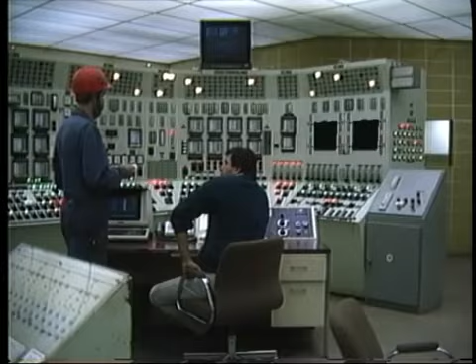Let's assume that our boiler is being returned to service after a maintenance outage. It is completely cold. The first step in preparing this boiler for service is to make sure that all of the maintenance jobs have actually been completed and that all permits to work have been canceled. We then need to take a walk around the boiler to make sure that all workers are out, all tools, materials, and debris have been removed, and that access doors and manholes are closed. All auxiliary equipment, such as feedwater pumps and fans, must also be ready for operation with switchgear and breakers racked in and power supply available.

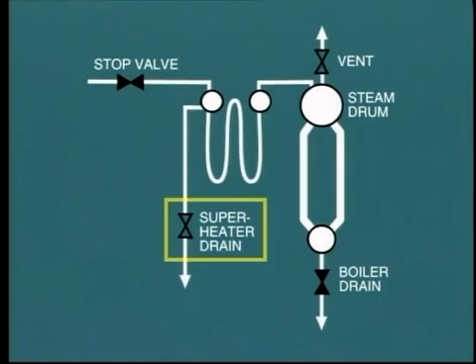If the boiler has been drained during maintenance, it will now be necessary to refill to the working level. Before admitting any feedwater into the boiler, make sure that the appropriate drain valves are closed. We must also check that the air vent valves are open on top of the steam drum. The superheater drain valves should also be open.

In order to pump feed water into the boiler, it may be necessary to run the feed pump. However, in many installations, an auxiliary low-pressure pump may be provided for this purpose. As feed water enters the boiler and the water level rises in the tubes, air will be expelled from the open vents. The boiler should be filled to a level so that it is just visible in the bottom of the gauge glass - that is about 3 or 4 inches, say 10 centimeters, below normal working level. The reason for this is to allow for expansion as heating of the water takes place.

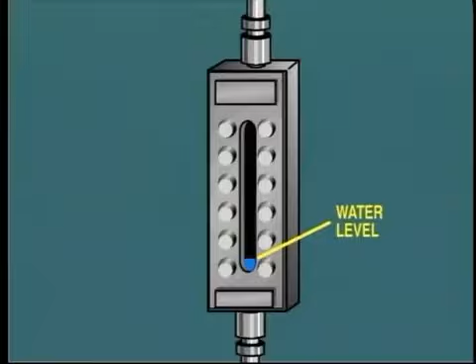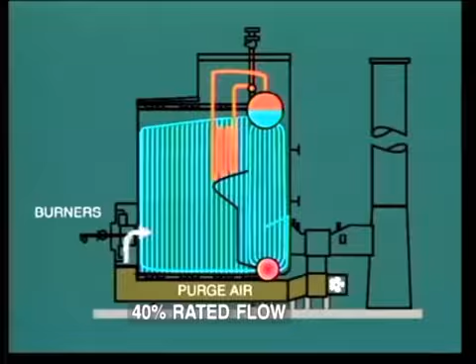While the boiler is filling, we should make sure that the combustion equipment is primed and ready for service. Startup burners normally use light oil or gas, both of which are readily combustible. However, before lighting a fire in the boiler, it is essential to purge the furnace and gas passages. This action consists of passing a large quantity of air, say 40% of rated flow, right through the boiler and up the chimney to atmosphere. The objective of this is to purge, that is, sweep away any combustible gas that may be present, perhaps in pockets of the furnace, superheater, or air heater.

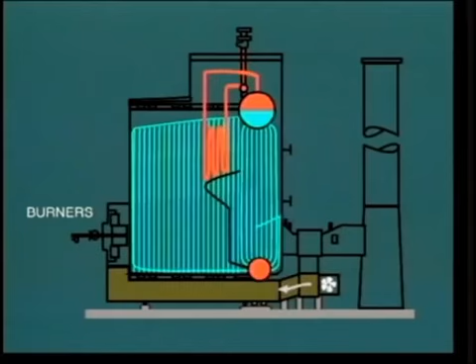If purging is not carried out, there is always the potential for an explosion to occur when the first burner is ignited. The purge action is carried on for several minutes, and this requires that the forced draft fans be run, and induced draft fans if installed. After purging, the airflow is reduced to the pre-established startup value, usually 10 or 15% of rated flow. The boiler is now ready to begin firing.

Each startup igniter is initiated either by local push button or remotely from the control room. The igniter runs through its own startup sequence as follows: check that there is a flow of combustion air, check that oil pressure is correct, close the switch to ignite the spark plug, check that the arc is present, open the ignition fuel valve, and observe that ignition takes place and that the fuel continues to burn.

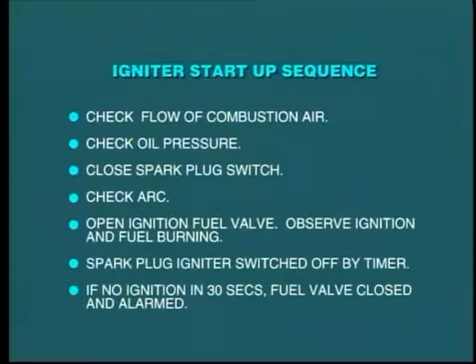Once the fire is established, the spark plug igniter will be switched off by a timer. If ignition does not occur within about 30 seconds, the fuel valve will be closed and the condition alarmed. The rate of adding heat to the boiler is dependent upon the number of startup guns which are placed in service. Also, in many cases, the fuel pressure to the startup guns can be adjusted so as to allow further control over heat input to the boiler.

It takes a considerable amount of time to heat all the metal in a cold boiler, including the water contained inside the tubes and drum. We should expect to see steam blowing from the air vents after an hour or so. We will also notice that the level of water has risen. This is due to both thermal expansion and also some swell as boiling starts to take place. You will remember we discussed swell and shrink caused by steam bubbles in an earlier module.

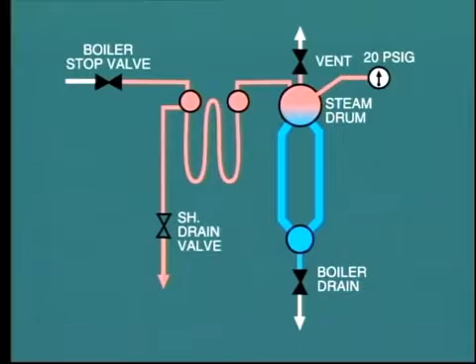When the steam pressure rises to, say, 20 psig or 140 kilopascals, the air vents on the steam drum should be closed. At this point, we can assume that all air has been expelled from the boiler, and steam at this very low pressure fills the space above the water as well as inside the superheater as far as the boiler stop valve. The temperature of the water and the steam and the water wall tube metal will all be at or close to the saturation temperature corresponding to the pressure - that is about 230 degrees Fahrenheit or 110 degrees Celsius.

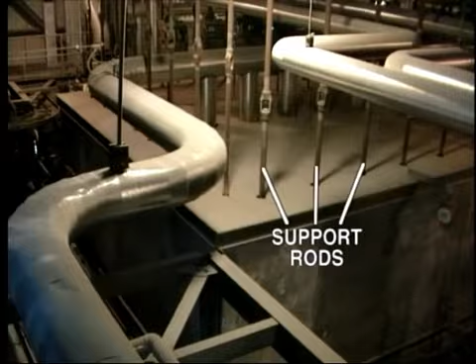This rise in temperature from a cold start will cause considerable expansion of the boiler metal, and this must be allowed for in construction. For example, this particular boiler, which is bottom supported, is built to allow expansion in an upward direction. On large boilers, support is effected from above, with the boiler suspended and held by heavy steel rods, so expansion takes place in a downward direction.

In some installations, you may find an indicator which shows the amount of expansion from the cold position. This may be as much as 12 inches or more, say 30 centimeters, between the cold start position and full load.

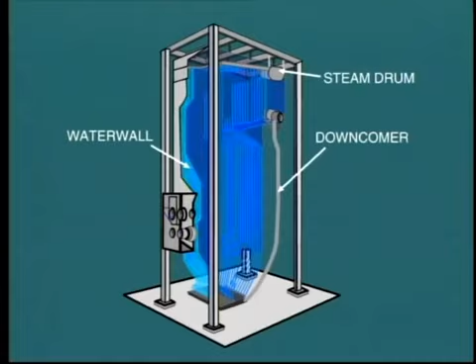Because of the stresses imposed by this expansion of the body of the boiler, there is a limit to how fast we can add heat. A general rule of thumb is that the temperature of the water walls should not increase at a rate above 100 degrees Fahrenheit per hour, say 55 degrees Celsius per hour.

But during this startup operation, how do we know the precise temperature of the water walls? Well, we can easily infer this from the steam pressure. First, assume that the metal temperature is equal to or similar to the temperature of water inside the tubes, and this will be approximately equal to the saturation temperature corresponding to the steam pressure.

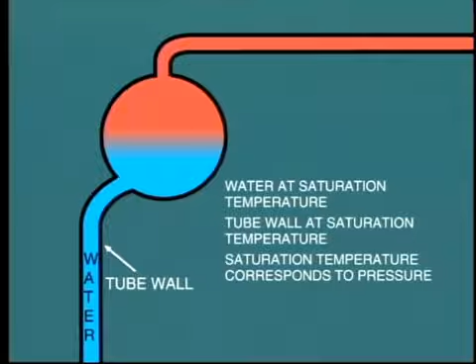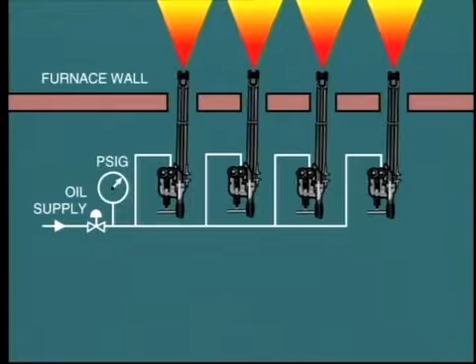So bearing this in mind, let's return to our startup procedure. Now that the drum air vents are closed, the steam pressure will start to increase. We should observe that it rises in accordance with our startup curve, but what control do we have over this? Well, if pressure rises too quickly, we will need to reduce the fuel pressure to the igniters or perhaps extinguish one gun. On the other hand, if pressure rises too slowly, we may need to throttle in the superheater drains, but we cannot go far with this. Remember that it is essential to keep steam flowing through the superheater in order to keep the metal temperature cool.

For some period of time, the water level will continue to rise as pressure increases. This is due to increasing temperature plus increase in steam generation, which creates more bubbles in the water. But where is the generated steam going? Well, the only steam flow from the boiler is that passing through the superheater drains. But of course, as the pressure increases, so will the steam flow increase through these valves. Eventually, this flow will become so great that the water level starts to fall. This means we are dumping more steam than is being generated at this time.

Eventually, as the water level falls further, it will be necessary to start the boiler feed pump and add feed water. We also may be able to throttle in the superheater drains further so as to reduce this wastage.

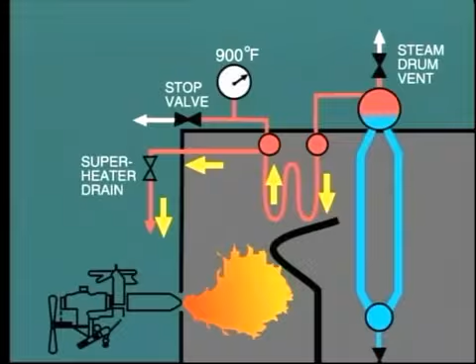Actually, the opening of these valves has some influence on the steam temperature at the superheater outlet. How is this? Well, if the steam flow through the superheater is increased by increased opening of drain valves, the rate of firing will need to be increased so as to continue pressure raising. This results in a greater volume of combustion gas passing over the superheater, consequently transferring more heat to the steam, so raising its temperature. This maneuver is sometimes employed when we are trying to match steam temperature to the steam turbine metal temperature during a unit hot startup.

However, remember that in order to achieve this, we are burning more fuel and dumping heat to waste. In some circumstances, this waste heat may be recovered, and we'll be talking more about this arrangement when we discuss turbines in another module in this series. At that time, we will also discuss the procedure for charging the main steam line and opening the boiler stop valve. We must point out here that a boiler stop valve is not always installed, and in this case, the steam line will be charged with steam throughout the startup, right down to the turbine stop valve.

Often on a cold start, steam is admitted to the turbine quite early in the pressure raising cycle, say when the boiler pressure is about 400 psi. The objective is to raise steam pressure and temperature on the boiler and run up the turbine at the same time. If this is a reheat unit, the reheat drains must be opened during the run-up period.

Once the turbine is synchronized and carrying load, the superheater and reheater drains may be closed, as steam is now flowing through the superheater and reheater and on through the turbine.

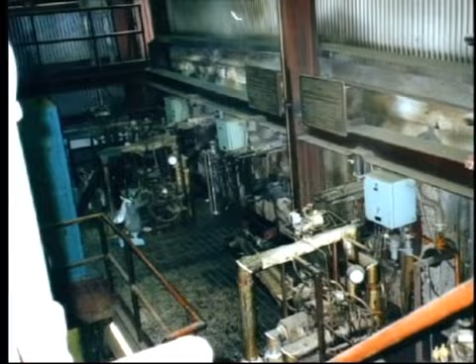Also, during the initial loading, it is likely that one or two of the main fuel burners will be placed in service, and the associated startup burners shut down. We are speaking here of heavy oil or gas firing. Where pulverized coal firing is involved, the boiler will usually remain on oil firing until turbine minimum load is established, say 10%.

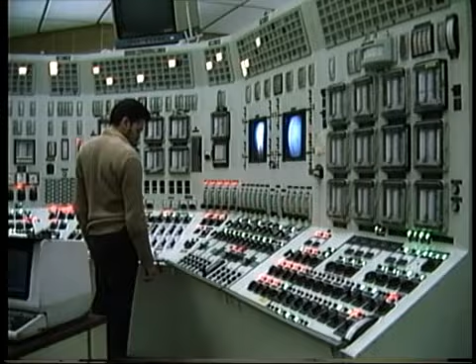During pressure raising on the boiler, attention must be paid to maintaining the correct water level in the drum. As soon as possible, the automatic water level control should be placed in service. Similarly, other controls should be put in automatic service, although this may not be possible until the turbine minimum load has been reached. We'll be discussing monitoring and control systems in detail later.

So at this point, we have the boiler up to rated pressure supplying steam to the turbine generator. The boiler must now be controlled so as to maintain rated steam pressure and temperature as the generator load and consequently steam demand changes. We'll be talking about on-load operation in the next segment, but first, let's take a brief look at a boiler shutdown procedure.

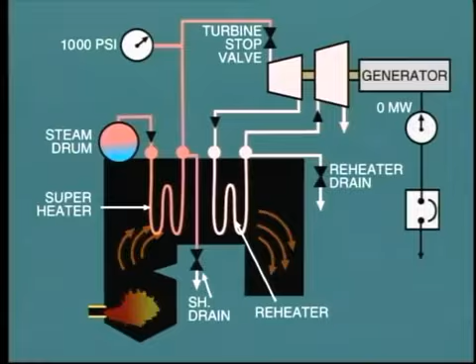As load is reduced on the turbine generator by reducing steam flow, heat input to the boiler must be reduced. This is done by taking burners or pulverizers out of service and reducing combustion air accordingly. Once the generator is taken offline and the turbine stop valve closed, the fire should be extinguished completely. The FD and ID fans will be shut down and dampers closed. All drains should remain closed and feed water topped up to a high level in the gauge glass.

In this situation, the boiler is said to be in a boxed up or bottled up condition. As the heat is retained inside the boiler with very little heat lost to atmosphere, the steam pressure will fall slowly, perhaps to 50% within 24 hours. As the pressure and temperature fall, the water level in the steam drum also falls slowly, so that it becomes necessary to top this up from time to time. The objective of this boxed-up condition is to keep the boiler available for a quick startup. In this condition, we can restart the boiler and raise pressure to rated value within, say, 1.5 hours.

A different situation would prevail if the boiler was being taken out of service for maintenance. In this case, we would run the ID and FD fans so as to purge the boiler of gas and also to force cool the hot metal and refractory. Even when the pressure falls to zero, further cooling would still be necessary for some time after, so as to allow personnel to enter the boiler.

Let's now examine the requirements for on-load operation of the boiler and some of the difficulties which may be encountered. The prime task of the boiler operator is to assure that the boiler follows changes in steam demand from the turbine generator and maintains the rated steam pressure and temperature. Steam pressure is controlled by adjusting the heat input, that is, the quantity of fuel supply and associated combustion air.

Of course, this sounds easy, but in practice it takes considerable effort and experience to obtain good, clean, efficient combustion. We already know that for efficient operation, a precise quantity of air must be provided to match the fuel input.

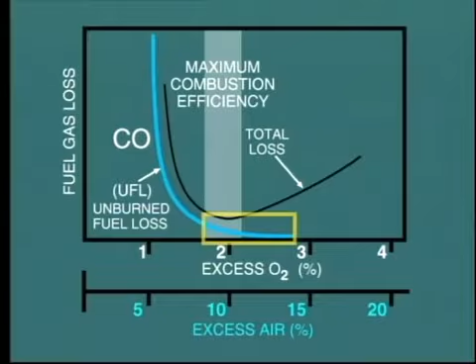This curve shows the effect of either insufficient or too much excess air. You can see that with insufficient air, boiler losses increase considerably due to incomplete combustion, with the resultant presence of carbon monoxide and unburned carbon in the flue gas. Increasing the air supply will usually complete the burning of carbon monoxide to form carbon dioxide. It should also reduce the amount of unburned carbon. However, if too much excess air is provided, the heat loss increases again due to the larger quantity of excess gas discharging from the chimney. So this task of maintaining the correct fuel-air ratio is extremely important.

The operator must also look at other factors in order to create the very best conditions for combustion. These factors include physical condition of the burners. Is the fuel and air being directed into the correct location and mixed thoroughly? Fuel atomization in the case of oil, and adequate grinding in the case of pulverized coal. Correct distribution of combustion air between burners and between primary, secondary, and over-fire air.

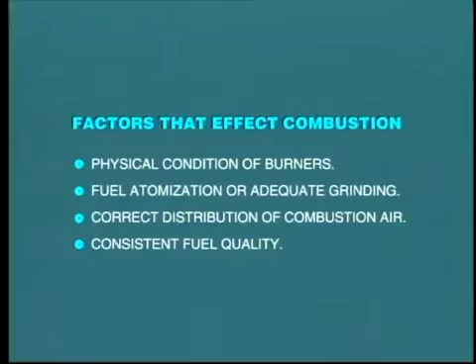Consistency in fuel quality can easily be forgotten. Where fuel supply has changed, perhaps from one coal to another, the operator must be made aware of this fact and the characteristics of the new supply. For example, the incoming coal may have higher moisture content or be less volatile and more difficult to ignite. It may contain increased ash, which may cause slagging. Operators must be aware of these conditions so they can be prepared for potential problems.

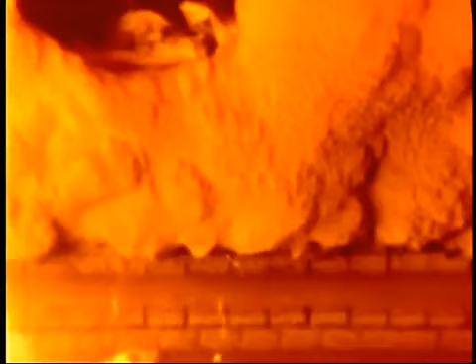The incidence of boiler fouling and slagging due to ash is one of the major problems in boiler operation. Let's take a closer look. Ash is the generic name given to mineral elements in the fuel which are non-combustible. Typically, ash is made up of minerals such as silica, alumina, iron, calcium, magnesium, and so on.

Let's first examine the effects of ash in an oil-fired boiler. Fuel oil contains only a small amount of ash, say 0.5%, but this still creates problems. When the fuel enters the furnace, the carbon and hydrogen begin to burn, releasing the metallic elements. Initially, the high flame temperature causes some of these elements to become molten, or semi-liquid. However, these particles soon cool as they move away from the center of the flame and solidify, falling by gravity to the bottom of the furnace.

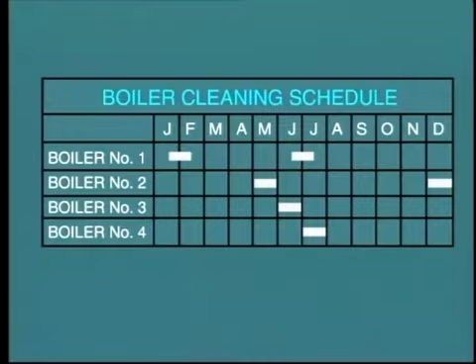The ash at the bottom of the furnace accumulates, often to a thickness of several feet, and eventually the boiler must be taken out of service for cleaning. The time period between outages for cleaning may be 6 months or even as long as 12 months in some cases. The ash deposit is extremely hard, and considerable physical effort, assisted by jackhammers, is required to remove it.

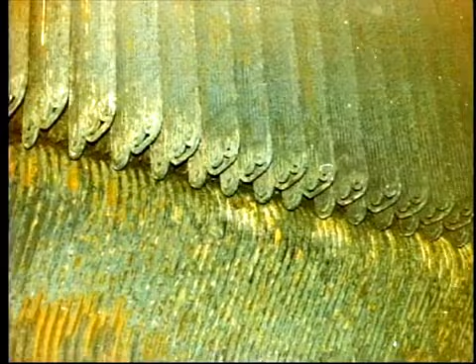However, not all of the ash collects at the bottom of the furnace. Some of the lighter particles are carried in the gas stream through the superheater. If the ash particles are still friable, they may stick and deposit on superheater tubes and water wall tubes. In most cases, though, the ash deposits are more likely to be in the form of dust, known as fly ash. Where this collects on superheater tubes, it results in reduced heat transfer and consequently lower steam temperature. Retractable soot blowers are installed and operated usually once per shift to blow the fly ash off the superheater tubes.

The fly ash is collected in hoppers below the superheater. The total quantity of ash is quite small, so there's no need to empty these hoppers except at long intervals, such as during the outage for boiler cleaning.

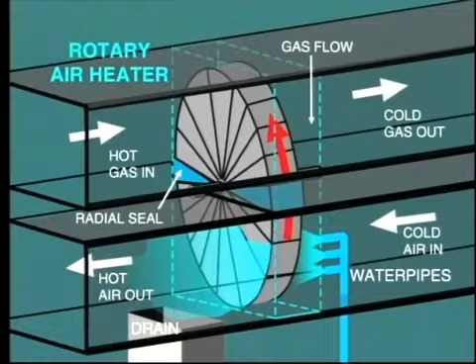A small quantity of fly ash may continue on with the combustion gas to deposit on the surface of the air heater. If this deposit builds up, it may be necessary to take the boiler out of service to wash the air heater. To perform this task, jets of water are sprayed onto the rotating air heater to remove any deposits.

In the fuel oil-fired boiler, the ingredients of ash which cause the most problems are sodium and vanadium. In fact, fuel oil analysis usually quotes the sodium and vanadium content in parts per million, ppm. A vanadium content of 250 ppm is considered high and will be troublesome. Similarly, a sodium content over 200 ppm creates problems.

Sodium has the effect of aggravating the tendency of deposits to stick on boiler tubes. Vanadium causes high-temperature corrosion in the superheater zone. At the high gas temperatures encountered in this zone, the vanadium becomes molten and mixes with excess oxygen to form vanadium pentoxide, indicated by the symbol V2O5.

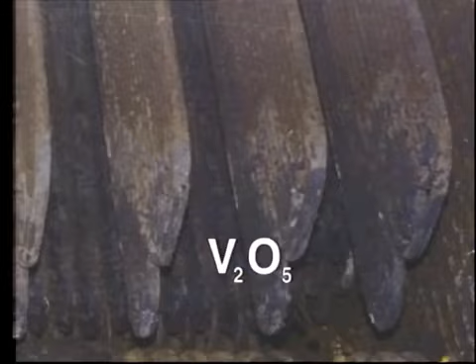This molten compound runs down the superheater tubes and forms a hard deposit around them. Worse yet, it causes external corrosion of the tube metal and also of the tube supports.

Is there any way we can reduce the negative effect of vanadium? Well, yes. One way to reduce the formation of vanadium pentoxide is to reduce the amount of excess oxygen available for combustion. But this is something of a trade-off, because if we reduce the excess air too much, we run the risk of causing incomplete combustion.

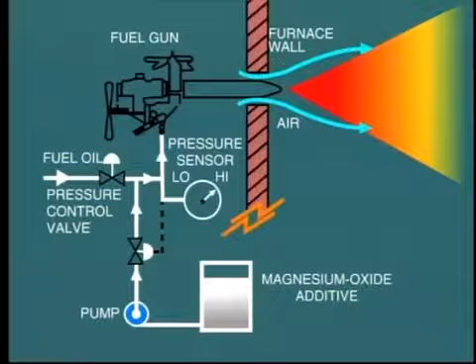Clearly, extremely tight control over excess air is required. In some oil-fired boilers, a magnesium oxide additive is mixed with the fuel. Its objective is to raise the fusion temperature of the vanadium pentoxide, and so hopefully allow it to pass right through the superheater zone without settling on the tubes.

So much for ash in fuel oil. Where processed natural gas is used as the fuel, we are extremely lucky, as it contains zero or negligible quantities of ash. Let's now turn our attention to coal, which unfortunately does contain large quantities of ash, typically 12 to 15%, and in some cases much higher.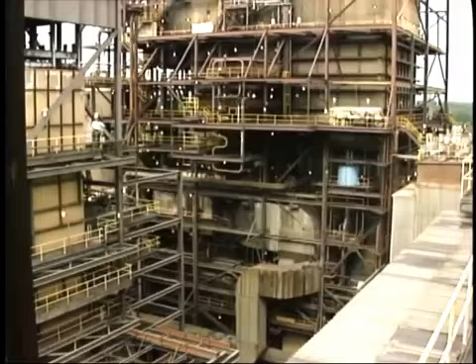In all cases, when burning coal, the boiler must be designed for a specific coal. For instance, where a large quantity of ash is contained in the fuel, the volume of the furnace must be large in order to handle the large volume of material.

With pulverized coal firing, the fouling mechanism is similar to that for fuel oil. That is, the metallic elements are released during combustion and fall to the bottom of the furnace. This is known as bottom ash. Clearly, the amount of ash which is collected at the bottom of the furnace is far greater than in the case of the fuel oil boiler. For this reason, ash must be removed on a continuous basis, or at least daily.

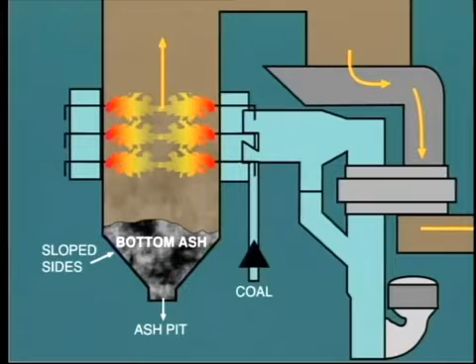The bottom of the furnace is shaped like this so as to allow ash to run down the water-cooled slopes and fall into the ash pit. From here, various means are provided for removing the ash.

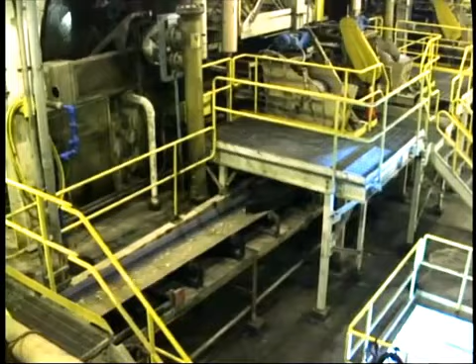Water is used to break the ash into manageable components. In one typical system, a drag scraper pulls the ash from the ash pit into a crusher, where the large pieces of slag are broken down into smaller pieces. From the crusher, the ash may be conveyed to a processing plant for recovery as construction fill.

Another method uses high-pressure water to flush and carry the ash to the ash dump, which is in the form of a pond. Some of the water is then recirculated to repeat the process.

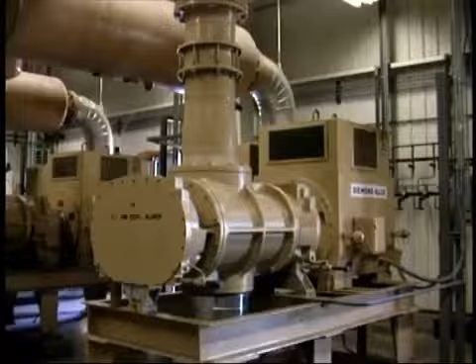Because of the relatively large quantity involved, fly ash from coal can cause serious problems due to deposits, fouling, and blockage of gas passes between superheater tubes. One serious problem is the formation of deposits on the furnace water walls, resulting in loss of heat transfer to the water inside the tubes.

This means that the boiler needs to be fired harder in order to maintain output. The consequence of this is that the temperature of combustion gas entering the superheater zone is higher than normal, causing the steam temperature to rise. Hopefully, we can provide enough de-superheating water to keep this under control.

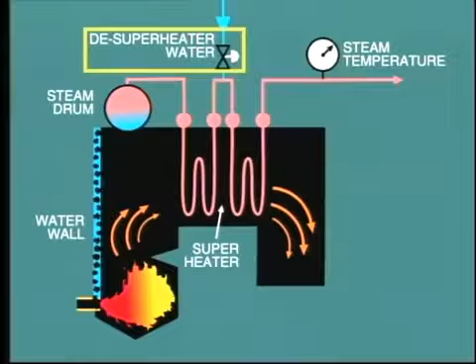But a greater problem is that the higher gas temperature may be sufficient to bring certain elements of the ash into a molten state, forming large clumps of slag that can block the flow of gas through the superheater and reheater tube banks. Apart from visual inspection, this condition can be confirmed by looking at the draft pressure indications at different points in the boiler.

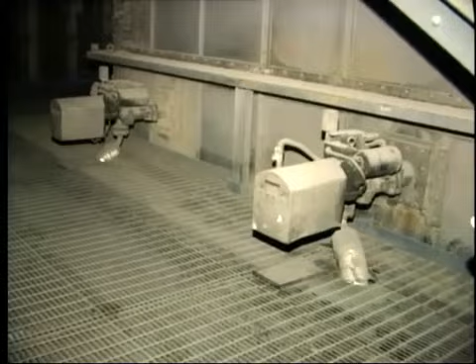In order to help maintain clean furnace walls, a large number of rotary soot blowers are installed on the walls, in addition to the retractable blowers that are provided to keep the superheater and reheater tubes clean. In many plants, it may be necessary to operate all or at least some of the soot blowers on every shift. This operation is usually performed remotely from a panel in the control room.

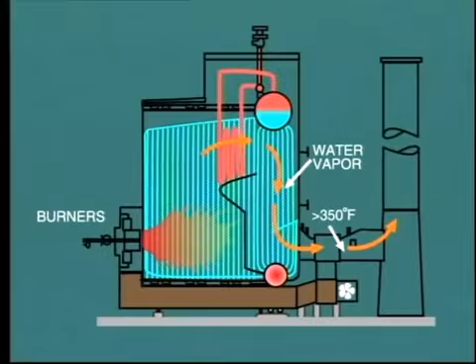We've already mentioned that sulfur contained in the fuel can cause serious corrosion problems. This occurs because the sulfur gases SO2 and SO3, when mixed with water, may be converted into H2SO4, sulfuric acid. But where can the water come from? Well, you'll remember that the combustion of hydrogen in the fuel produces water, or water vapor to be precise. Now, as long as the temperature in the gas passing through the boiler remains high enough, this water remains as vapor and consequently does not mix with the sulfur gases to form sulfuric acid.

However, if the temperature of the combustion gas is allowed to fall below what is known as the dew point, about 250 degrees Fahrenheit, that is 120 degrees Celsius, sulfuric acid may form and cause considerable damage to iron and steel components.

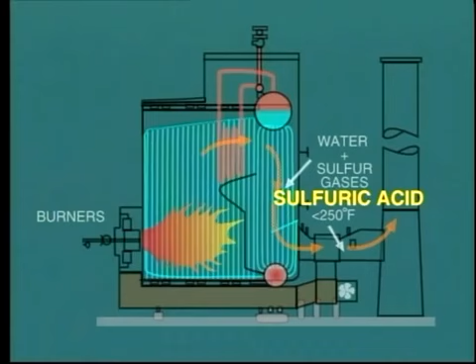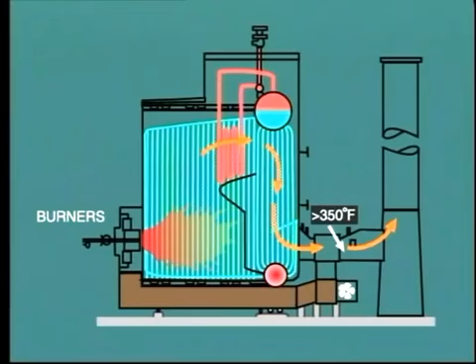The area where this is most likely to occur is in the air heater. Remember that the incoming air is entering from atmosphere, and this may be at a temperature of, say, 60 degrees. Consequently, the temperature of the metallic element of the air heater in contact with the incoming air will also be quite low. In order to avoid air heater corrosion, we need to make sure that the temperature of the combustion gas leaving the air heater is above about 350 degrees Fahrenheit.

The precise safe temperature depends upon the actual fuel analysis. But how can we control this exit gas temperature? Well, the most commonly used method is to preheat the air entering the air heater by passing this through a steam preheater in the ductwork.

This is controlled so as to raise the air temperature to about 150 degrees Fahrenheit. On many installations, this preheater is only used during low load operating conditions. At high load, the gas temperature leaving the boiler is high enough for the metal temperature to remain above the dew point in the air heater.

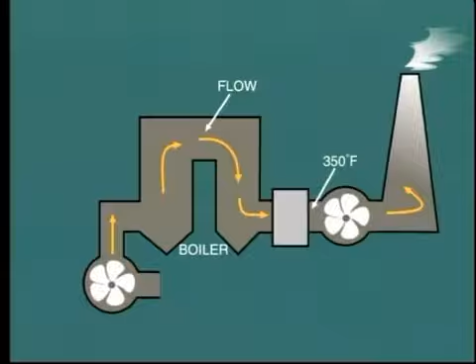By raising the exit gas temperature, we do incur a penalty, that is a loss of efficiency, because the waste gas is now discharging to atmosphere at a higher temperature and consequently a higher heat loss. Like many segments of operation, we are faced with a trade-off: either lose boiler efficiency, which means increased fuel consumption, or suffer damaged air heater components, which will result in replacement cost and outage time.

Clearly, there is an efficiency advantage when burning low sulfur fuels. Many gas-fired boilers run with exit gas temperature as low as 270 degrees Fahrenheit, 130 degrees Celsius.

We briefly mentioned the effect of boiler fouling and slagging on steam temperature. Other than soot blowing, do we have any other means of controlling steam temperature? Well, yes, we do. You will remember that we discussed in an earlier module the system of attemperation, where desuperheating water is injected into the steam between the primary and secondary superheater.

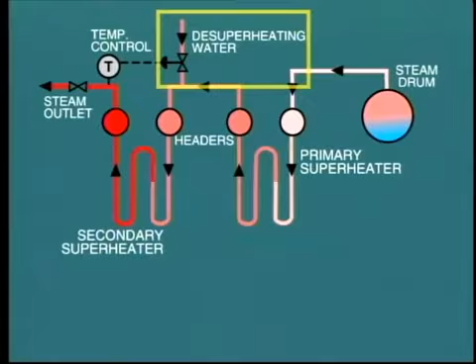A similar installation is fitted to the reheater so as to control reheat temperature. However, in both of these cases, attemperation is in one direction only, to prevent temperature rise. If all of the desuperheater water is shut off, what can we do to increase steam temperature?

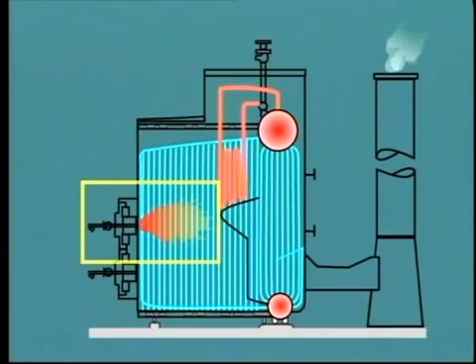Well, one way of achieving this is by using upper row burners only where load permits. In this case, the combustion gas entering the superheater will be at a higher temperature as less heat is absorbed in the furnace. A variation on this is to have tilting burners. In this case, we can direct the flame down like this, or up like this, so as to increase superheat and reheat steam temperature.

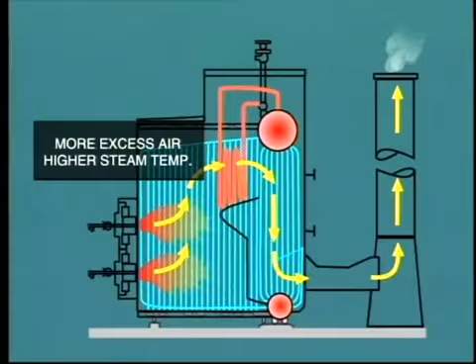Yet another way to increase steam temperature, sometimes used on small boilers, is to increase the amount of excess air supplied for combustion. The effect of this is to increase the volume of gas passing through the furnace, which in turn absorbs a certain amount of the heat released by combustion of the fuel. The result is that less heat is transferred to the water wall tubes, but more heat is carried over to be transferred to the superheater.

Of course, you can see the disadvantage of this method. It is uneconomic, as it increases boiler heat loss. Moreover, this technique may not work with all boilers. It depends very much upon the design of the boiler and the location of superheaters.

So up to this point, we've looked at the factors affecting boiler operation. Now, we need to look at the actions required to control the boiler, and we'll talk about this in the next segment. For now, please switch off the tape and review this material in your workbook.

In order to make the correct adjustments during boiler operation, we need a continuous flow of information so as to indicate the actual operating conditions. Monitoring equipment is installed at many points on the boiler to measure, indicate, and record the status of different operating parameters. Taking this oil-fired boiler as an example, let's consider which particular points we would like to measure.

Or to put it another way, what do we need to know in order to operate the boiler efficiently? We can conveniently split our monitoring requirements into specific areas: the steam and water path, the air and gas path, combustion conditions, fuel supply, and equipment status.

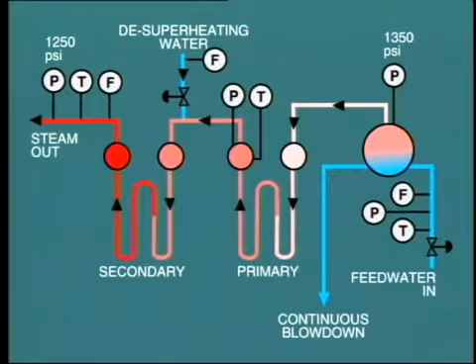In some units, the pressure and temperature at the primary superheater outlet header may be measured. But more important in this area is the need to know the flow of de-superheating water provided for steam attemperation.

This indication can provide useful operating information regarding boiler cleanliness. For example, if we find that a large flow of de-superheating water is required, it is probably an indication that the furnace walls are dirty and need soot blowing. Conversely, if the steam temperature is falling and the de-superheater water flow is zero, we can assume that it is the superheater tubes that are dirty and need soot blowing.

So much for the steam and water side. Now, let's move on to look at monitoring of the air and gas circuit.

First, temperature. It is general practice to measure temperature at the FD fan inlet, that is, ambient air temperature, the air inlet of the air heater, if fitted, the air outlet of the air heater, gas temperature at the boiler outlet, that is, before the economizer, if fitted, the gas inlet temperature to the air heater, the gas outlet temperature from the air heater.

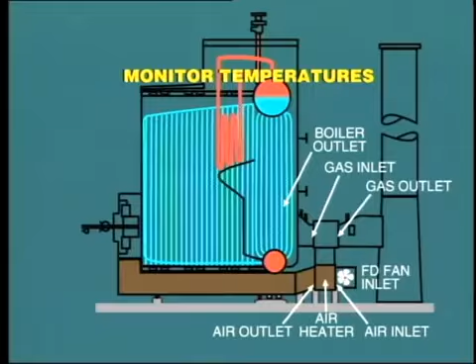This last temperature reading is very important, as it indicates the temperature of gas exiting from the boiler to atmosphere. The higher this temperature, the greater the heat loss from the boiler.

Heat loss will also be affected by the amount of excess air provided. This is indicated by measuring oxygen content in the flue gas. This should be kept as low as possible, providing that carbon monoxide or other combustibles do not form. Thus, another useful measurement in the flue gas is the concentration of carbon monoxide. Typically, an efficient boiler would be run with an indication of, say, 1.5% oxygen and 120 ppm carbon monoxide.

Another important parameter that must be measured is the air flow. This refers to total combustion air supplied, primary, secondary, and tertiary where applicable. This measurement of airflow is often used in automatic controls, which ensure that air supply is proportional to fuel.

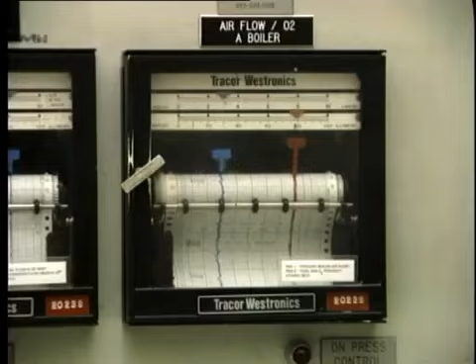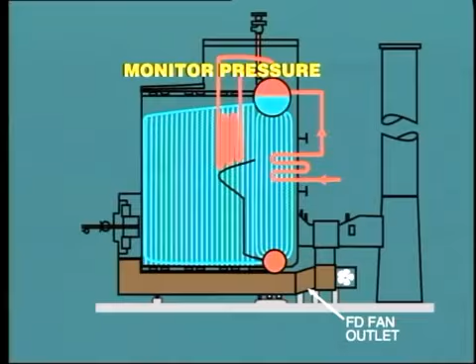We've looked at temperature readings for the air and gas path, but what about pressure? Certainly the indication of air and gas pressure at different points can be very useful to the operator. Taking our oil-fired boiler as an example, pressure is normally measured at the following locations: the FD fan outlet, the burner wind box, inside the furnace, after the superheater outlet, at the economizer outlet, at the air heater outlet.

The actual pressure throughout the draft system is quite low, and therefore a small unit of measurement is used, that is, inches or millimeters of water gauge, indicated as WG. 1-inch water gauge, that is 25.4 millimeters, is equal to a pressure of 0.036 psi, or 0.25 kilopascal.

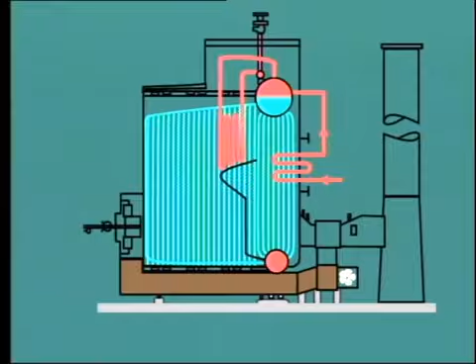The particular boiler we are studying here is not equipped with ID fans, and therefore operates as a pressurized system. In this arrangement, the pressure inside the furnace will typically be about 8 inches water gauge, say 200 millimeters. After a period of continuous operation, this value will tend to rise as the passage between the superheater tubes becomes blocked with ash and slag deposits.

The pressure on the FD fan outlet will consequently need to rise, which means that the fan will have to work harder. Eventually, we may come to the point where the fan simply cannot push the required quantity of air through the boiler, resulting in decreased steam output capacity.

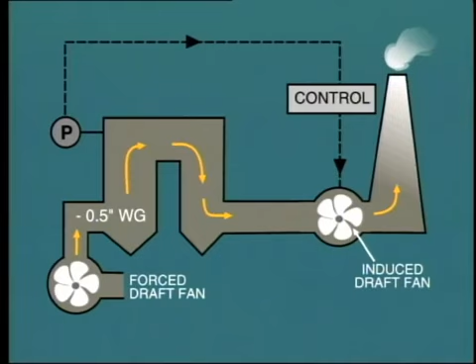On a balanced draft system, where ID fans are installed, the situation is different. In this arrangement, the ID fan is controlled so as to maintain within the furnace a slight negative pressure of about ½ an inch water gauge, say 13 millimeters. In this case, as the superheater tubes and/or air heater become blocked, it is the ID fan that will need to work harder to create a greater negative pressure in order to overcome the resistance to flow.

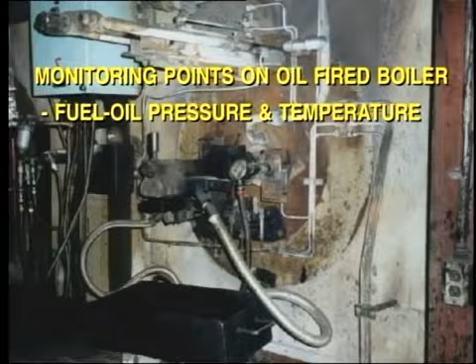Now let's turn our attention to the fuel supply. In the case of fuel oil firing, it is common practice to measure and indicate the following points: fuel oil pressure and temperature, fuel oil viscosity at the burners, fuel oil flow, ignition oil pressure and flow, individual burner gun position and on-off indication.

Gas burners need a relatively small amount of instrumentation, typically measuring fuel flow and pressure at the burners.

Where pulverized coal is used as the fuel, the following points are usually monitored: the quantity of fuel supplied, measured at the weighers which feed coal into the mill; primary and secondary air flow; air pressure or draft through the mill system; and temperature of primary air at the mill.

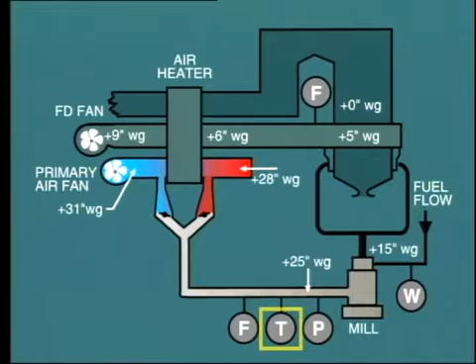Now, this last item is important. Hot air from the air heater is provided to the mill in order to remove any moisture that may be present. However, it may be necessary to reduce this temperature to prevent fires occurring in the mill, depending upon the type of coal being fired. This is achieved by admitting tempering air from atmosphere to mix with the primary air so as to achieve the desired temperature.

In this review of monitoring points, we're concentrating on the major items. Further instrumentation is required for monitoring boiler emissions and other environmental factors. We'll be discussing this in the next module. No doubt on your boiler there are many other monitoring locations. You must learn where all of the sensors are located and the significance of the information provided.

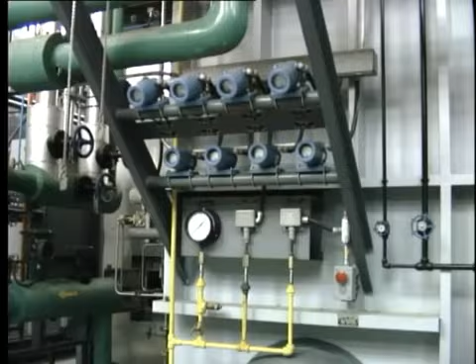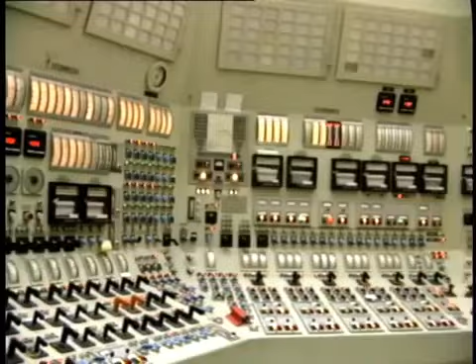Measurements are performed by appropriate pressure, temperature, or flow sensors. At some points, local indication is given, but normally the measured information is transmitted to a central location for display. In the traditional control room, continuous analog readings are indicated on instruments and recorder charts like this. The experienced operator can sweep his eye across the panel and observe all of the operating parameters at a glance. Indicating lights are also available to indicate equipment on and off and valve positions.

Nowadays, this system is replaced by a computer terminal with perhaps 2 or 3 CRTs that provide the same information. The computer or microprocessor has the advantage that it can store information, and this can be retrieved where we need to investigate operating incidents. The computer can also print out operating logs at predetermined time intervals, and can also provide a sequence of events printout in case of system upsets.

Whether we're using a traditional or modern system, the information from sensing devices can also be used to operate automatic controls. We'll be taking a closer look at boiler control systems in the next module. But at this point, it's time for us to take a break, and then we'll come back and talk about protection devices on the boiler. For now, please switch off the tape and thoroughly review this material in your workbook.

When we think about protection of the boiler, we need to consider just what are the hazardous conditions that may arise during boiler operation. What is it that we have to protect against? Well, the basic dangers are a furnace explosion due to incorrect combustion conditions, a rupture of boiler tubes due to overheating, and rupture of metallic components due to excessive internal pressure.

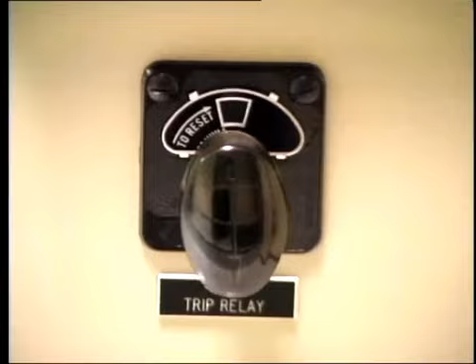Now, there are a number of different operating conditions that can lead to the dramatic failures that we have just mentioned. So the boiler must be equipped with, first, an alarm system to warn the operator of impending dangerous conditions, and secondly, protective devices that will automatically take preventive action.

One of the most obvious potential hazards is that of water level control. If for any reason insufficient feed water is supplied to the boiler, then the water level in the drum will fall, and eventually there will be insufficient water to provide circulation. The result would be rapid overheating of water wall tubes and tube rupture in many cases. Even though today's boiler water level control systems are highly reliable, we must still guard against this possibility.

Usually, a low water level alarm will annunciate when the level falls to, say, minus 10 inches, that is 250 millimeters below normal operating level. If no action is taken and the level continues to fall, say to minus 20 inches, that is minus 500 millimeters, then the boiler trip relay will be activated.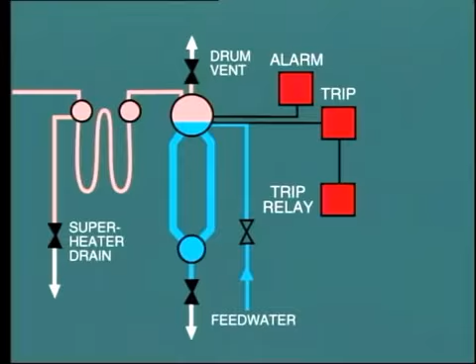So what does this relay do? Well, its most important action is to shut off the fuel, thus extinguishing the fire and removing the source of heat. The fans are normally left running, but with the airflow through the boiler adjusted to a preset minimum position, say 10% of normal rated airflow. This will clear residual combustion gases out of the boiler and at the same time keep it in a ready state for a quick start.

However, if the feed water conditions cannot be recovered, then the operator will shut down the fans and close up the boiler. But what happens to the steam pressure at the boiler's steam outlet? Well, of course, as soon as the fire is extinguished, this pressure will start to fall.

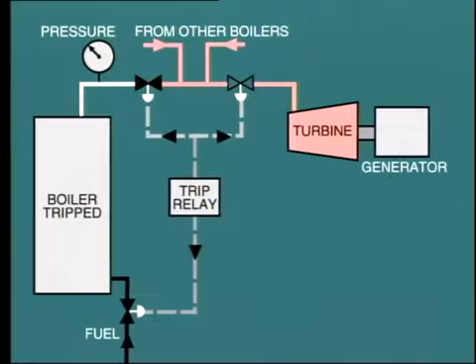So in order to protect the downstream equipment, the boiler trip would also need to shut down the turbine and other downstream equipment. If the boiler happened to be feeding into a common steam header in parallel with other boilers, then the boiler trip would close our boiler stop valve.

So much for low water level. But we also run into problems if the water level rises too high in the steam drum.

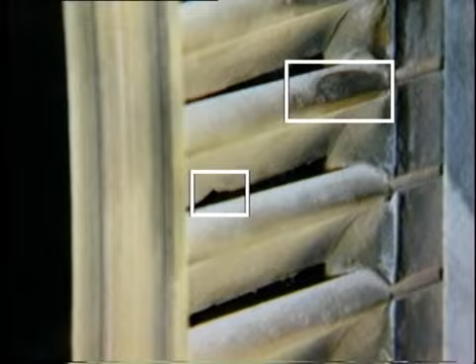In this case, we run the risk of water being entrained in the steam and passing on through the superheater and on to the steam turbine. Any tiny water droplets contained in steam can cause tremendous damage to turbine blades because of their extremely high velocity. So high water level in the boiler is a potential danger to the steam turbine. Again, a high water level alarm will annunciate, to be followed by a high water level trip.

We've just mentioned the potential overheating of boiler tubes due to lack of water. But as we have mentioned before, we can also run into overheating of superheater tubes during startup due to lack of steam circulation through the tubes.

It is quite common to monitor the temperature of superheater tube metal, as this provides useful information during startup. In most installations, the superheater tube metal temperature monitor does not trip the boiler, but it does actuate alarms when the temperature rises to an abnormally high level.

Now, in addition to problems caused by high temperature, we can also damage boiler tubes and components by excessive high pressure. But what could cause such a rise in steam pressure? Well, just imagine what happens when the boiler suffers a load rejection. That is, the steam turbine or other downstream equipment suddenly decreases load. In this case, the boiler is suddenly left with minimal steam flow output and a large heat input still entering the boiler. The result is an immediate increase in steam pressure.

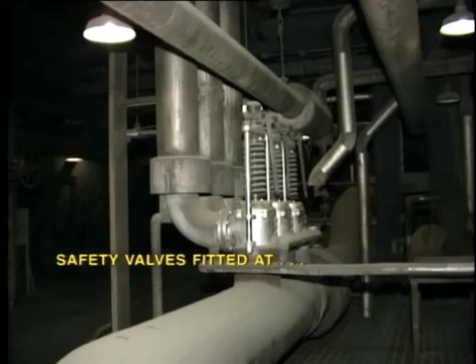In order to alleviate the immediate pressure rise, safety valves are fitted at different locations, such as the main steam outlet from the boiler, the secondary superheater outlet header, the primary superheater outlet header, and the steam drum.

The safety valves are calibrated so as to lift in a desired sequence. That is, the outlet valves first and the drum safety valves last. The objective is to make sure that adequate steam flow is maintained through the superheater tubes. Once pressure falls back to normal, the safety valves close again in the opposite sequence, that is, drum first.

But how do we correct the high pressure situation? Well, clearly, we need to decrease the fuel input to the boiler. Sometimes the reduction in steam demand is short-lived, and the pressure falls again, just as the operator is reducing fuel input. However, if the load rejection is complete, such as a steam turbine trip, then it may be necessary to shut off the fuel supply completely to the boiler.

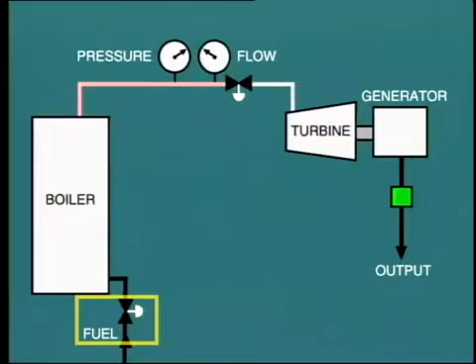A master trip button is often provided for this purpose at the control console. Normally, the fans are kept running so as to keep the boiler purged of combustion gases and also to be ready for a quick start if required.

The precise calibration of safety valves forms an important part of boiler maintenance, which must be carried out at regular intervals. On many boilers, the safety valve located at the steam outlet is electrically operated and is known as an electromatic safety valve. This has the advantage that the valve can be opened manually by the operator if he wishes to increase steam flow through the superheater during startup, when pressure is far below normal.

We've just talked about load rejection causing a steam pressure rise, but this has other effects too. The sudden rise in pressure causes many of the steam bubbles contained in the water to collapse, with the result that the boiler water level in the drum falls rapidly.

Most control systems are able to cope with this shrink by opening the feedwater control valve wide to increase feedwater flow. An incidental effect of this large quantity of relatively cool feedwater entering the boiler is to help cause the steam pressure to fall back to normal.

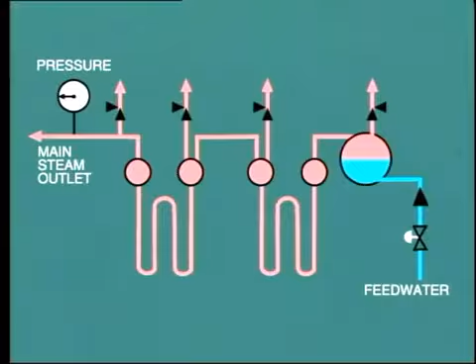The reverse condition occurs if we try to pick up load too fast on the turbine. In this case, the steam flow increases rapidly, the pressure falls, and the water level in the boiler rises. Note that this phenomenon of shrink and swell only occurs during very rapid changes in steam demand. Under normal operational variations, the automatic control system is able to cope well and maintain a stable water level.

In boiler operation, the most potentially damaging condition is that of a furnace explosion due to a fuel-rich atmosphere.

The presence of a large quantity of unburned carbon or carbon monoxide entering into contact with oxygen and then igniting will burn so rapidly as to form an explosion.

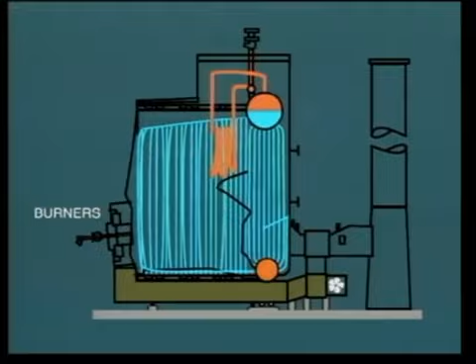A typical case may occur during startup. If fuel enters the furnace but for some reason does not ignite, even though we have plenty of combustion air available, we have conditions for an explosion. If we continue to supply more and more fuel and then suddenly provide a source of ignition, a furnace explosion would occur. This explosion can be very violent, causing tubes within the furnace to bend and break, support structures to buckle, and serious mechanical damage through the boiler.

For this reason, during startup or at any time, if there is ignition failure, the burner management system will automatically shut down the fuel input.

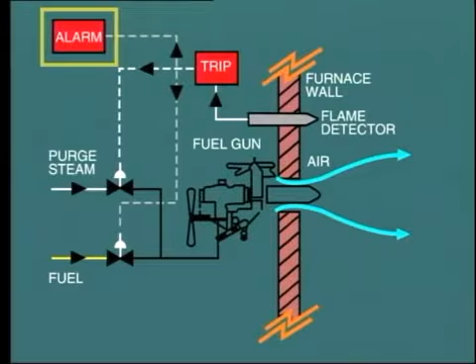But how does the burner know that ignition has failed? Well, this is achieved by fitting flame detectors on each individual burner. If the flame is extinguished for any reason whatsoever, or even a non-start, the device actuates a trip circuit to close the fuel supply valve to that particular burner. It also annunciates an alarm so that the operator is aware of the condition.

Once the burner is tripped, it goes through a purge cycle. This consists of blowing compressed air or steam through the burner so as to clean out any fuel or carbon which may be present inside the burner or at the tip.

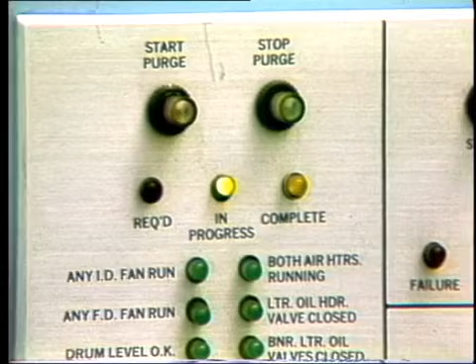The word purge is also used in connection with clearing the furnace of any combustible gases which may be present. We have mentioned this before. During startup, a purge relay actually prevents the fuel system from activating until the purge cycle has been complete, that is, the flow of a large quantity of air through the furnace and boiler for several minutes. Actually, the purge relay does not provide any protection for the boiler when the unit is on load. It merely prevents us starting the boiler and providing fuel under potentially dangerous conditions.

Let's consider what would happen to the boiler in case of loss of fuel supply. For example, suppose a fuel supply valve on a gas or oil-fired boiler closed due to a control equipment error. Well, in this case, the fire would be extinguished and all of the flame detectors would shut off the fuel supply to their respective burners.

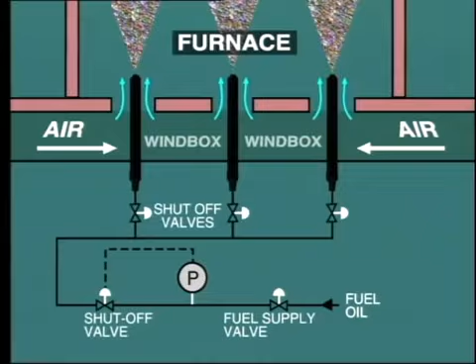This safety action is important because imagine what would happen if the faulty control valve were to suddenly open again after, say, 30 seconds. You can imagine the large quantity of gas or fuel oil entering the furnace with no flame or source of ignition. It would mix with the air to form a highly explosive mixture, which, coming into contact with hot boiler tubes or refractory, could actually cause a tremendous explosion.

This potentially hazardous condition is prevented by the closure of individual burner fuel valves by the flame detectors. Additionally, loss of fuel pressure will cause the shutoff valve to close.

Let us look at another hypothetically dangerous situation. Suppose the forced draft fan tripped so that we suddenly lost our supply of combustion air. Again, if fuel continued to enter the furnace, we would have a highly explosive mixture that may self-ignite on contact with hot furnace walls. To prevent this possibility, loss of forced draft or tripping of forced draft fans will trip the boiler, that is, it will shut off the fuel supply to the boiler.

Another hypothetical condition we need to examine is the loss of induced draft by inadvertent tripping of ID fans. Initially, with forced draft still being supplied, the pressure inside the furnace would rapidly increase from slightly negative up to a relatively high value, say 30 inches, 760 millimeters water gauge. In a very large furnace, this internal pressure may be sufficient to cause the water walls to bow outwards, with possible damage to the supporting structure.

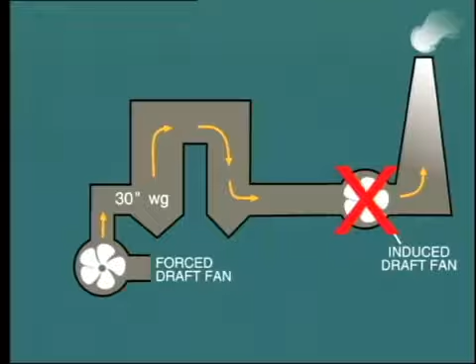Protection against this condition may be provided by a high furnace pressure alarm and trip, intertrip of FD fans, and fuel supply cutoff on loss of ID fans.

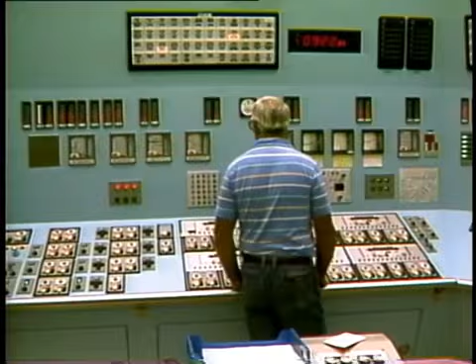You should study the arrangements on your boiler. It is essential that all protective devices on the boiler, including trips and alarms, be functionally tested at regular intervals to ensure that they do operate as required. You must be aware of the function of all protective devices and alarms on your particular boiler. Make sure that you know where all of the respective sensors are located, and also try to take part in the testing activities for protective systems.

Now, we still have other areas to cover in relation to boiler operation, including control systems, emissions, and chemical control of boiler water. Now, this will have to wait for the next module. At this time, please switch off the tape and review this material in your workbook.